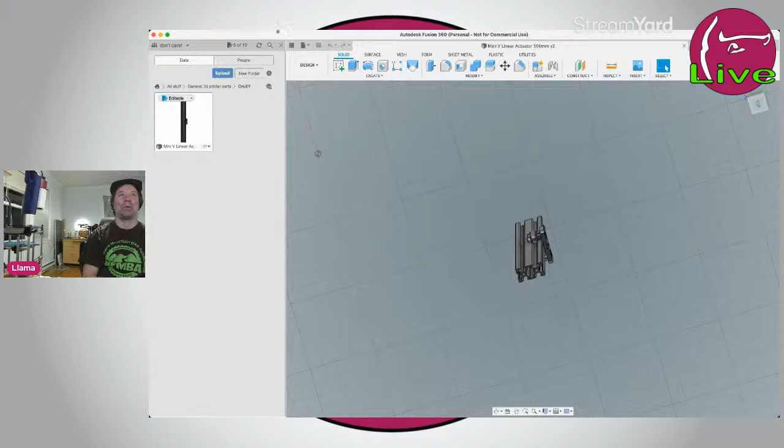What's up? Apple, there we go. It's weird that it does that. That's because it's in a little side window. If I bring it forward, it'll stop doing that. The new Apple app shelf, they have a little shelf on the side now.

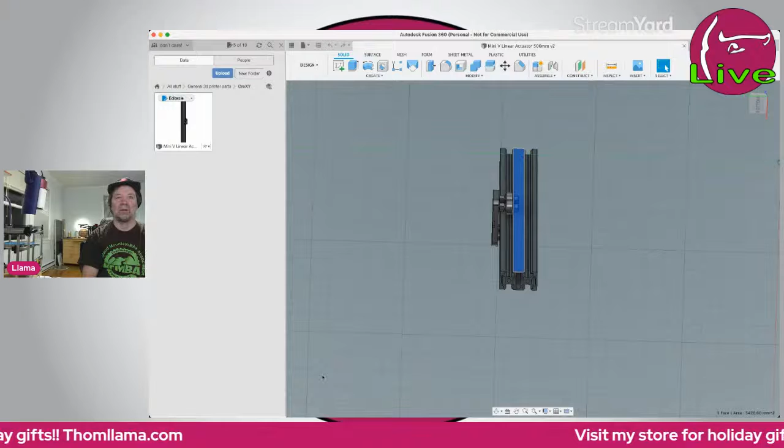So I'm really not sure what I'm going to do here, but I'm going to do something. But I think all I want is this. Where is it? Where is it? Right here. V-slot.

Is it done yet? Haven't even started. What's up, Mr. Monkey Man? How is life?

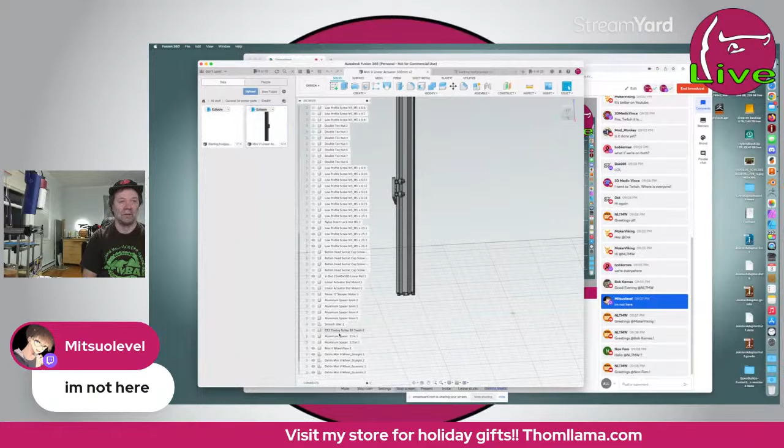Link, import new version, which it actually might not let me do where that's not my design. It is not my design, so it might not let me do it. Do you know what I can do? I can, right here, I believe, just grab the body.

And copy it, and go over here and paste it. Maybe not. I guess not. Maybe because I don't own that. That's not good. When you don't pay for it, it does.

I'm not paying for this. And where it's a proprietary item, it will anyways. All of them will, any of the good ones will.

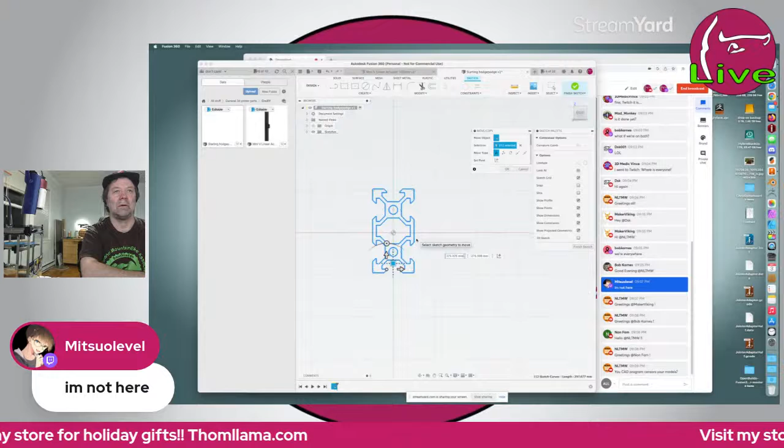Okay, project, and I know that's not actually what I want to do. Okay, but I think copy. Save, export. Copy, so I go over to here. I believe I can start a thing and hit paste. Okay, where is it? There it is. Okay, and there it is.

That's what I wanted. Now I can do an extrusion, solid. That was easy. And just go 400 for now. All right, we have a piece of freaking 2040 extrusion. What do you know?

20, 40. That's lighting.

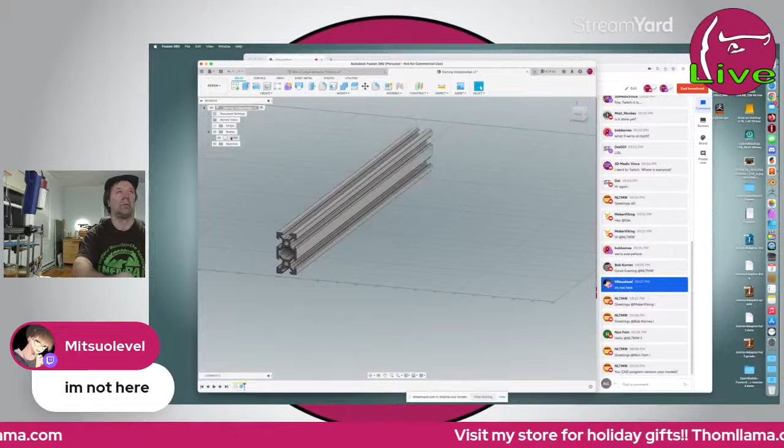Rename. Okay, so now I can take this, edit, copy, edit, paste. And I can go into Y in 400. I'm not worried about it being actually accurate yet, I'm just trying to get the basics going, get a concept here of what I'm going to do.

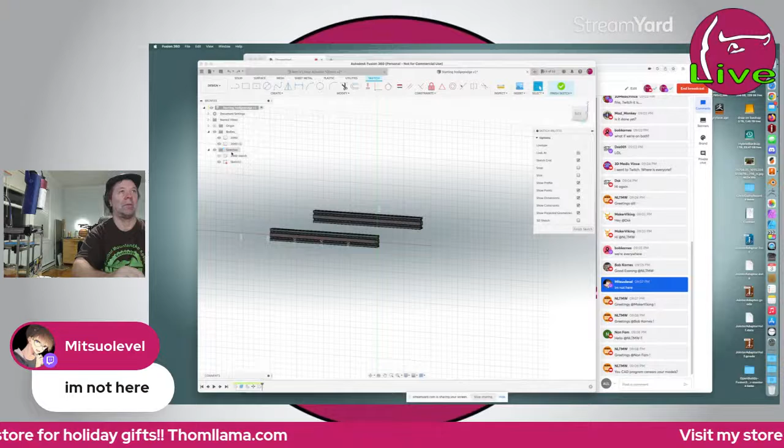And all that crap. Actually, I don't need to do that. Command Z. Because what I can do is, I actually want to start it there and go back to there. Okay, I want to paste. Where did it go? Why doesn't it ever paste it where you need it? Where the hell is it? Oh, it pasted another hole. I didn't want that, gosh darn it. I want this. I screwed up. Finish sketch.

Because I already copied and pasted, project, because that's the only way you can get it. Project the body, this one. Okay. That select the outlines too. Oh, let's find out. Copy. Finish sketch. No, that's not doing what I want. Copy. Sometimes it doesn't do it from the copy, so I'm going to go up here and actually hit copy.

What's up, Polymate? How have you been, my friend?

How has life been? All right, now I want to get to the front, and I want to go in there, and I want to sketch, and I want to paste, Command V, and that kind of did what I want. And actually what I think I'm going to do is do it over here, because I'm going to make this 2020.

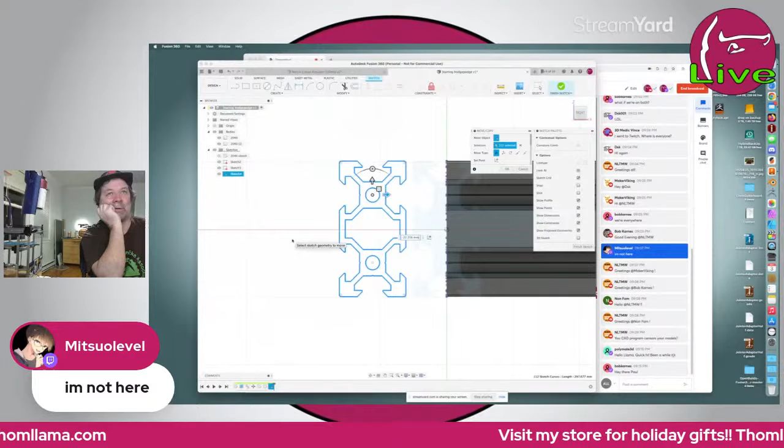Okay, so I'm going to, okay, it does do that. So I can go like so, hit delete, and then I can go like so, and make this a, whoops, that's not what I wanted. I wanted to make it a sketch line. And then I can like this and create a mirror. And then I can extrude that. Negative 400. And boom, I've got a piece 2020.

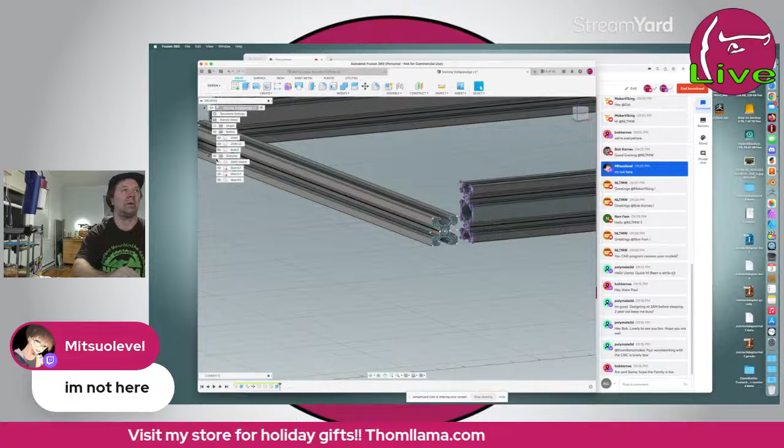Whoa, I just want this body. This is 2020. And I should be making these all individual components, but I'm not yet. This is just a concept anyways.

And pitch this over here, about 400. And those all line up. I don't care about it being perfect at this point. I'm good designing at 2 a.m. before sleep. 2-year-old keeps me busy.

Oh right, it's like really early in the morning over there, huh? Hey wow, your woodworking with the CNC is lovely. Thank you. Yeah, I've been watching your speaker modifications and stuff, looks pretty cool.

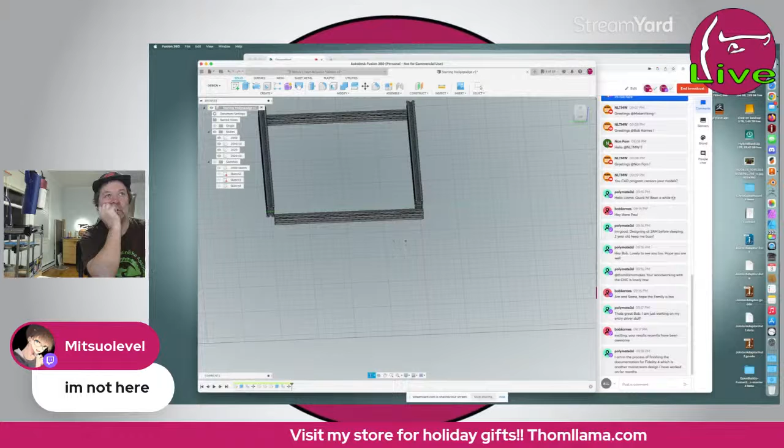So, if I... Okay, why did my controls also die? Yeah, let's move this one somewhat into line.

It don't have to be perfect at the moment because none of this stuff really matters other than for my head, for my brain power. Because lengths of these are all unimportant. Placement is sort of important, but not even really, other than they're flush on the top or bottom. And again, I should make all of these frickin' components.

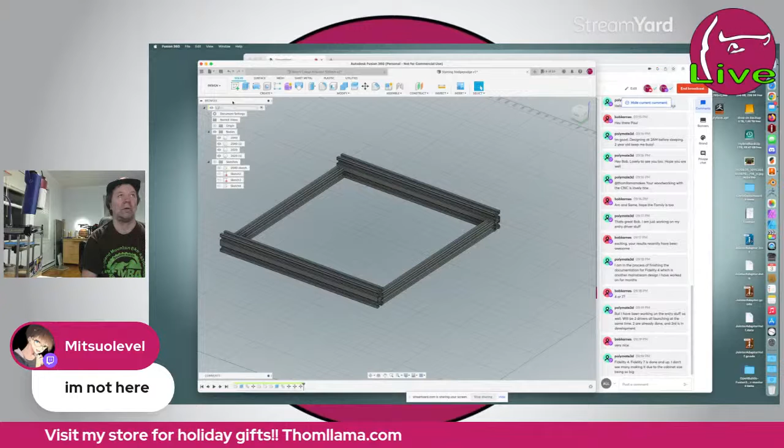Edit, paste. This is going to go up here. Oh oops, that's not what I wanted. What the hell did I do? I did something wrong. Paste. There we go, bring it this way. Bring it this way. Okay.

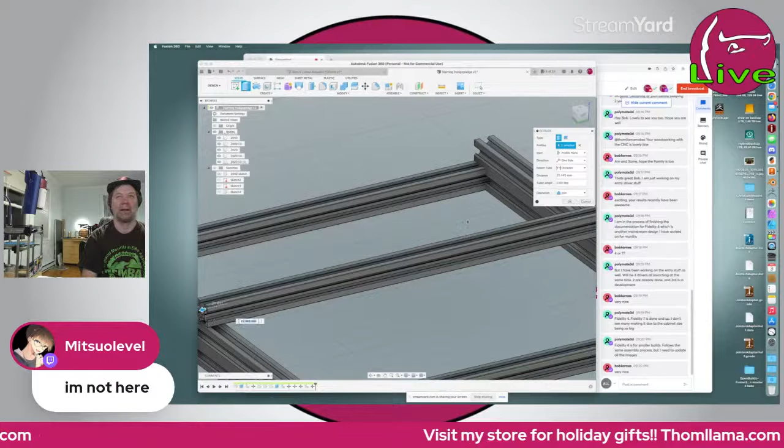Again, this is just so I have a concept of what I want to do. I will be doing this again and making things actually accurate in the long run. But for now, let's see, we'll make that the X gantry.

Copy. Paste. Negative 90, I guess, will work. Oops, I didn't want to do that. But, Y gantry. And let's move the Y gantry. It's going to go over here. And it's going to go over here. And it's going to go down here, like right about there. Okay then.

Bong, I have an email. YouTube, new comment from.

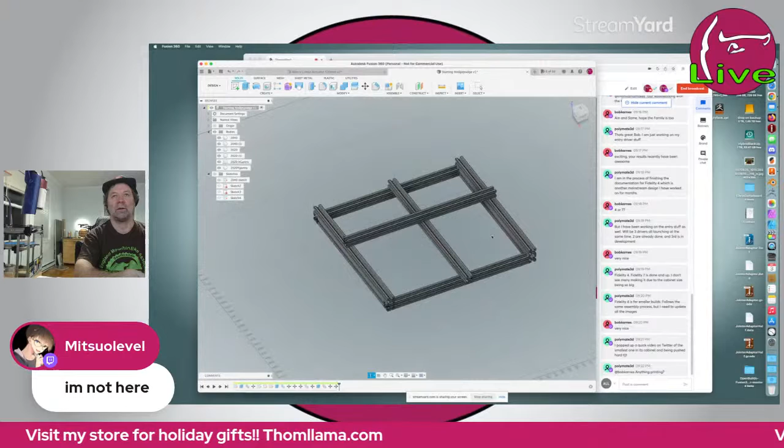Lost my mind, I want to actually do this. Yep, okay. So, here's sort of how it's going to go. I got to move that some more. It's got to go this way, some. Okay then. And then let's just edit this back this way. So it's about there. And everything lines up where it's supposed to be.

Merry Christmas, hedgehogs. Why, are you printing a Christmas hedgehog, Bob? Oh, that's what I got you. Polymate was asking you what you were printing. You're printing Vikings freaking hedgehogs. It's not a Viking helmet hedgehog? Is it not a Viking helmet hedgehog? This printable is going to let me log in today.

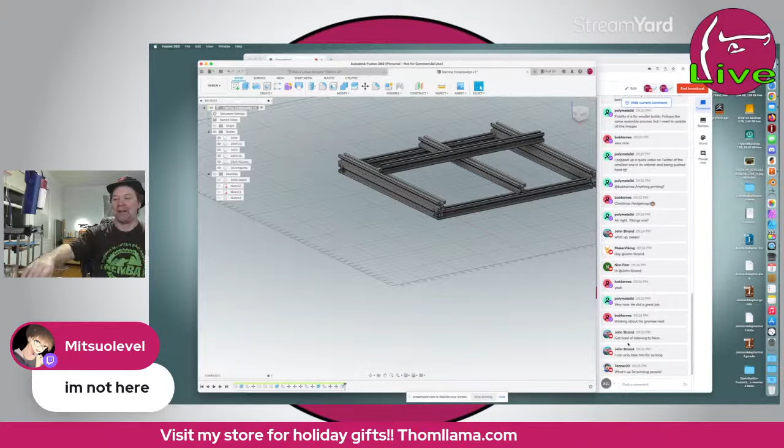Got tired of listening to Nero. Yeah, I like Nero a lot. Don't get me wrong, but he has changed some, but there was only so many freaking Vorons you can see him build that it just gets tired.

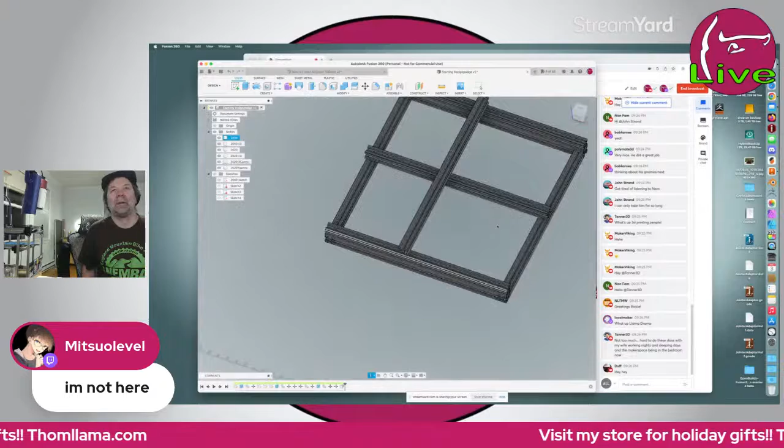So anyway, that's the basis of the Cross Gantry. So I'll be using a 2020 down here with the wheels like that on it. And then on top of this one, it'll be another one. And then what's up, Duff? And then I have to think about how I'm going to mate it all here to work. And part of the thought was, can I isolate this thing? Let me just grab that. No, didn't think so.

That's their mini wheel cart. It's not your standard wheels, it's mini wheels, which is what I actually use on this. No, this is not an Ender. So it'll be a cross gantry. Basically, right here, the extruder sits. And as this goes back and forth, it goes back and forth. And as this goes back and forth, it goes back and forth.

Yeah, it's a fancy new printer design that's been around a really long time because Ultimakers are actually Cross Gantry or CroXY. It's what Ultimakers are. And for some reason, I think Ultimaker has a patent on it, or someone does, and Ultimaker licenses it or something. Because there's only like 3 printers that have them. Ultimaker has them. I believe a couple of Raise3Ds have them. And I think Sigma or someone with an S that's all in Europe a lot. It's like a big semi-professional Signa, something like that. I think they have one too. That's a cross gantry.

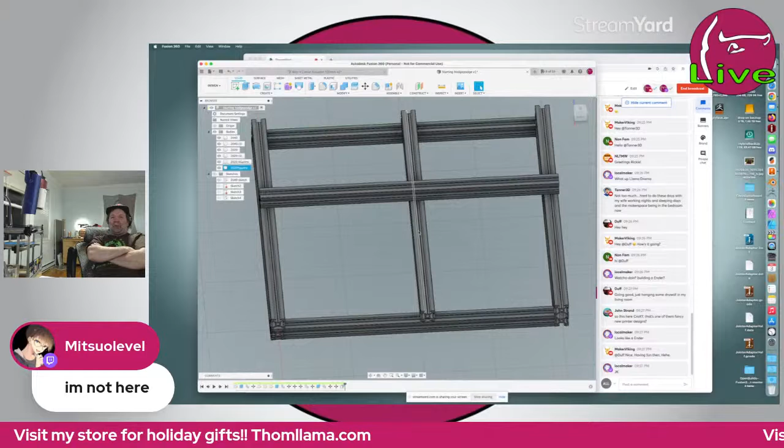Basically, it's the same concept as all the other ones. It's just I'm going to run a belt from here to the motor, from here to the motor for the one gantry, and then the same thing on here. You'll have a motor here somewhere, and there'll be a belt on both ends of this going back and forth. And like, yeah, it's the same thing. I can't do linear rails basically because I can't afford linear rails. And I already have all the 2020, and I have a buttload of these 2020 mini carriages because I just tore some printers apart. Actually, it's less complicated than CoreXY.

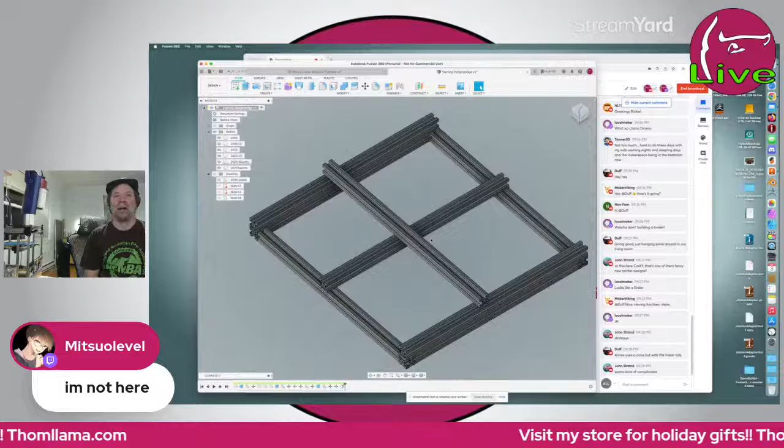I mean, in all reality, you only need one motor and one belt driving one of these. The problem is this thing, I'll never get it tight enough and within tolerance that this thing will move smoothly and squarely by not having a belt on the other side, which is no big deal. You just have a loop out and back and a loop out and back, and then over here you have a loop out and back, and over here you have a loop out and back, and that's it. The only real complicated part is the gantry here, and it's not complicated. It's just figuring out the best way to do it. And I'm thinking, because normally you would put it on the side here.

Let's just draw a plate here. Let's see, I can get rid of that one. I'm not used to working in such a small window. I usually fill my screen with this thing. So if I have a plate right here, I don't want you locking into anything. So if I put the plate right here, and what the hell happened? Oh, I got these off. That's what happened. Extrude it, say 5 millimeters, and try and join because it's touching it.

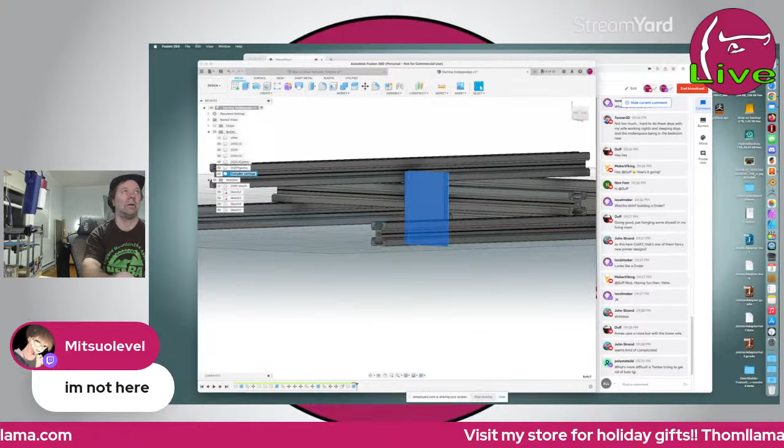New body. Okay, I should be doing components, but if I put this one here, and the wheels right on the top and bottom track, like you normally would, like an Ender or any other wheeled carriages, and if you copy, paste, and then I just rotate it 90 degrees, and then I shift it this way a little bit, boom, -55, say, okay. So you can mount your extruder here, and this would actually have to go up.

And feature, it's got to go up here. So it bridges that. But that's not really good either, but it's all right. It's close enough. Again, I'm just drawing this up for a concept.

What's more difficult is Twitter trying to get rid of bots. Yeah, Twitter's brought in bots, but we're not going to get into all that BS right now.

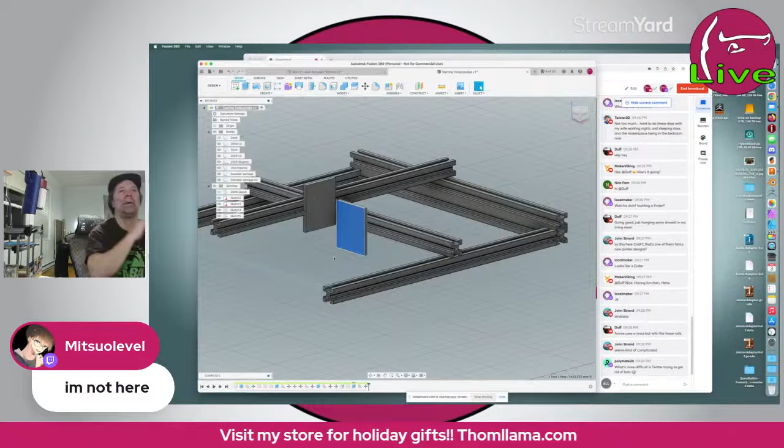So if I mount the extruder here, and the wheels are on top and bottom, as this thing moves back and forth, it's going to drag this with it, and it'll roll down there. And as it moves back and forth on here, it's going to drag it on there. And everything lines up, and it's actually pretty easy. The hard part is these plates right here, how I'm actually going to attach them and make them actually work.

Because the other thought I had was to take this and just go 90 and then bring it up and then bring it over. So it's like that. And then the extruder somehow mounts to this and this. And as it moves around, they both move.

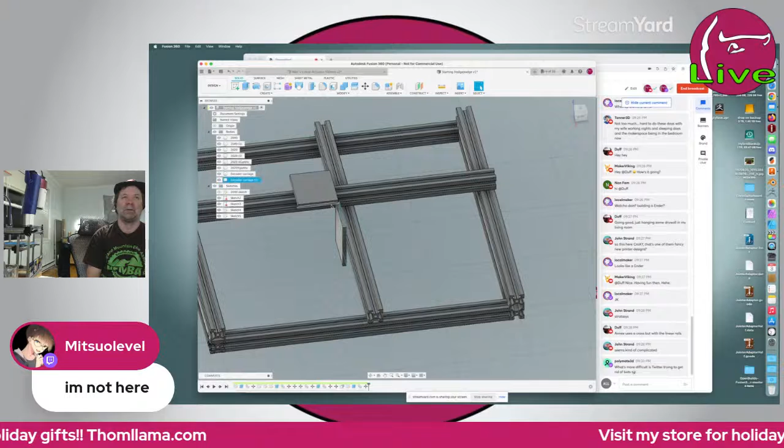And this is actually better for pulling, like when this one pulls it, it'll slide easier because it's pulling on the tension of, the wheel will be down here, right here, and right here. So as it pulls it back and forth, it's pulling level on the wheel. It's not trying to roll the wheel on the bolt. Does that make sense? The tension on the wheel is in line with the bearings. It's not trying to twist the bearing. So this, in one way, is a better layout.

But how to do it, I mean, it would be better if this one was too. I'm not sure how I would go about, maybe bring it up, bring it over, up above that. Yep. If I mount them both like this, how to attach them to the extruder is the weird part. This is the only complicated part. The rest of it's easy.

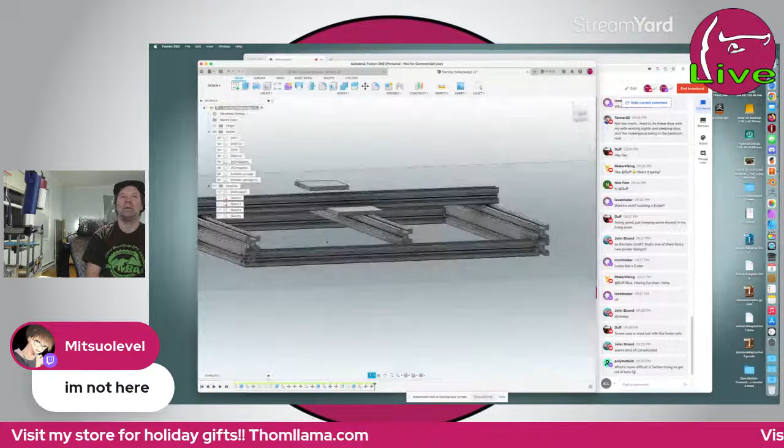It's just a wheel carriage here, a wheel carriage here, a wheel carriage here, a wheel carriage here, and then a generic freaking pulley loop on the front and back. The only hard part is if I can do it with a rod for the motor. Like I can mount the motor on one end and use just a smooth 8mm rod and put a pulley on each end of it to operate the belts. Or you can get one of those fancy motors that sits in the middle and has the drive shaft coming out each end. Six of one, half a dozen the other.

As far as I'm concerned, because I've got 8,000 motors, I will probably just use a smooth rod with a pulley on each end. Because I have pulleys and I have 8mm rods and I have motors. I'm going to try and use this, or the other half of this. That wasn't too good.

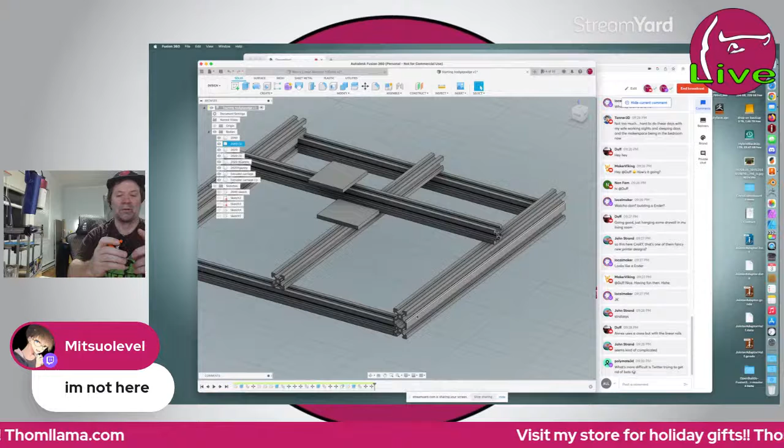Max sent me the newer body to this. This is the older body. And he sent me a newer one, which the wheels are not 3D printed anymore. They're injection molded. And the little orange disc is aluminum. And the whole body, because there's a lot of aluminum parts, is like half, 3/4 of an inch shallower, smaller. It's a little bit lighter too, I think. But that's neither here nor there. It's how am I going to mount it to these plates if I do it this way.

It's basically a wheel goes here. You know, wheels go here, here, here, here. There's 4. If I cut, I got some aluminum sheet outside. I've always wanted to try my CNC on aluminum. Oh, that will be dangerous. I don't have a bit that'll cut aluminum, at least not well. But I can get one, I guess.

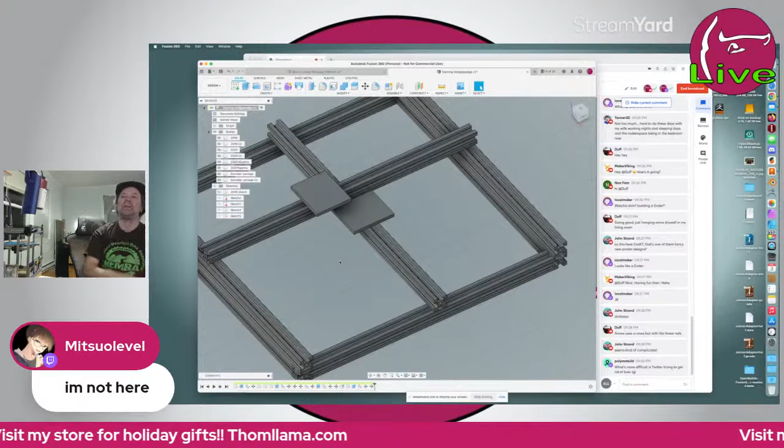And I can CNC it. I'd have to go really, really slow. I mean, the spindle and everything, I have no problems with it cutting aluminum. I'm just wondering if the actual frame is stiff enough to do it at any decent speed. If I cut slow, though, it'll be accurate enough for this. But then I could do a 3-wheel setup, like every Ender in the world, and only have one tension area, one eccentric nut instead of 2. Or I could just custom make a frickin' 3D printed carriage for all of this, which is what I have a feeling I'm going to do.

Because if I move this one out over this one, and that one stays there, and I connect these 2, and then I just put a plate between these 2, mount the extruder to it, I'm pretty much done. You guys probably can't visualize what I'm talking about, huh? That's all I'm doing tonight is laying this out and visualizing. This is my big problem, the extruder carriage. How I'm going to make the extruder carriage work.

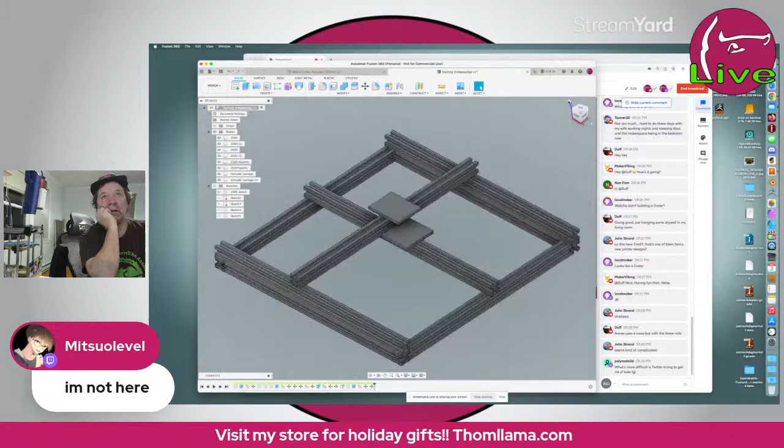Everyone's left. There's only 6 people still watching. I bored them all. That's not unusual. This is not for the faint of heart.

So, if I stack the carriages like this, I'm trying to think of how I can make this motor.

This is the body of the extruder. There's a motor that goes on here. These are the mounting points right here, which I can customize. The extruder is actually, there are the hot ends right here. Mounts right directly to this with the little plate and everything.

If you haven't seen an Omnia drop, go look at them. They're really cool. They work really well. This thing's like 3 years old. Look how perfect it is. And I use this heavily. This is on here.

And then I got a purple one, so I replaced it. This was on there like a year and a half, and then I replaced it. This is the one he sent me for a trial. And then I put it on the pumpkin, which I used the pumpkin more than I used this when it was alive. So this extruder got a lot of use in 3 years.

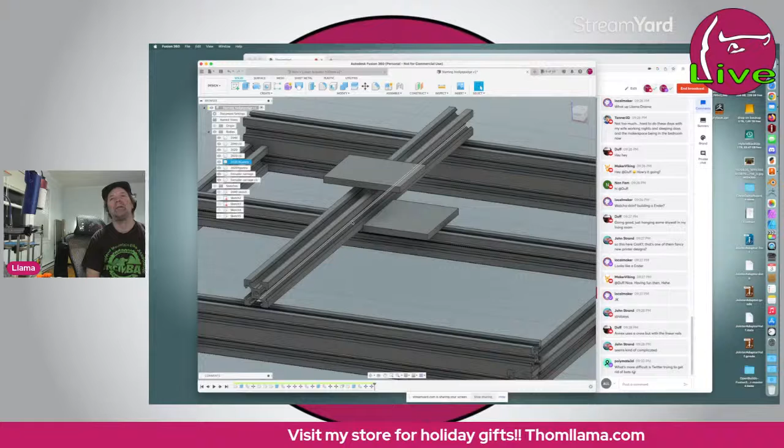So anyway, back to this. I have to figure out how I'm going to make this carriage. What do you guys think? This is the better way to do it. By having the wheels on the side of the extrusion, the forces on the wheel are parallel, in line with the bearing. They're not trying to twist the bearing. Does that make sense? So it's the better method of mounting the wheels for this kind of force.

Because basically, I'm going to have a motor right here. What is it? Their motor's 42 millimeters, 40 millimeters, 40. I'm just going to say they're 40. Again, this is just for a demo.

Why does it do that too? It only does it when I'm streaming.

So if I extrude it that way, whatever it is, let's just do 40 again. Again, this is just for basic idea concept. And then I do an 8 millimeter rod. Okay.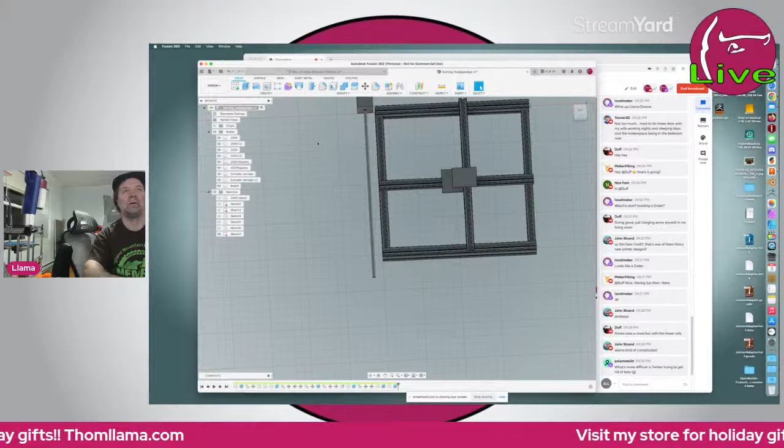Okay, so if I have a pulley here, and actually that would have to go longer. I have to say here. And actually, this whole thing needs to go this way some. So then I can put a pulley here, right there. I can put a pulley here on the 8 millimeter rod. I can put it, would have to be up higher.

Edit. Bring it up to meet that one. Close enough. Again, this is just for concept purposes. So I can have a belt going out and back. I can put a little idler arm here on this end.

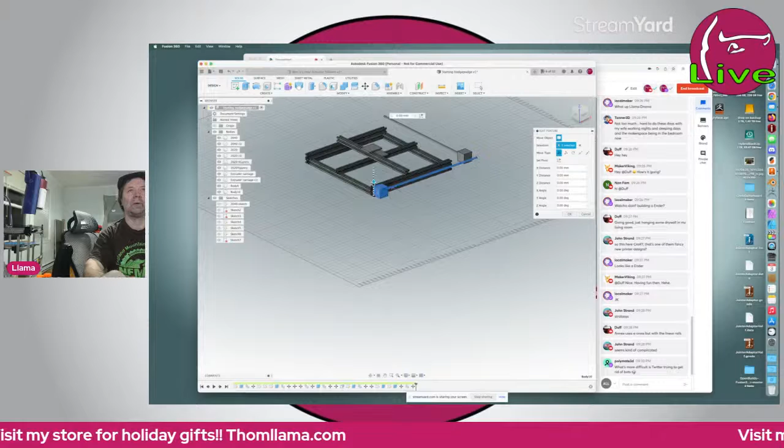Copy, paste. -90. Oops, not done with that. Bring it down here. Bring it out here. Okay.

So this belt loop goes down, catches this, comes back. This belt loop goes around, catches that, back. Boom, done. That should be easy enough. That should be very easy, actually.

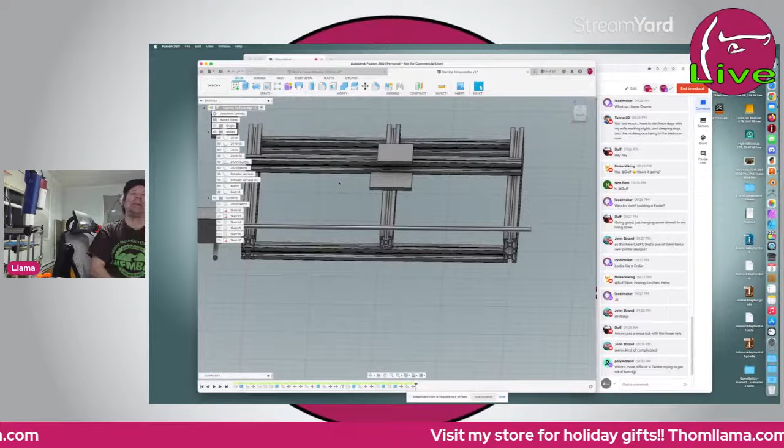I need to get actual dimensions from the carts I'm going to use, unless I'm going to make my own carts. Which might happen. I'm probably going to design this one. I was planning on just using the OpenBuilds mini wheel carts, but I don't think I can. I mean, I always can. It just might be easier to just 3D print the whole cart or multi-part cart.

Now, here's the other thing. One of these two, I only need 2 wheels on. I just thought of that. Because the carriage isn't going to twist. If I put 3 on the top one and only 2 on the bottom one, the 2 on the bottom one are enough. Because the third one doesn't matter so much. Because the anti-twist will happen from the 3 up top.

Or if I do 3 on the bottom and only 2 on the top, either way. All it has to be is one holding it from going forward and one holding it from going back. So if the carriage moves, the extruder carriage moves with it. I might have to think on that.

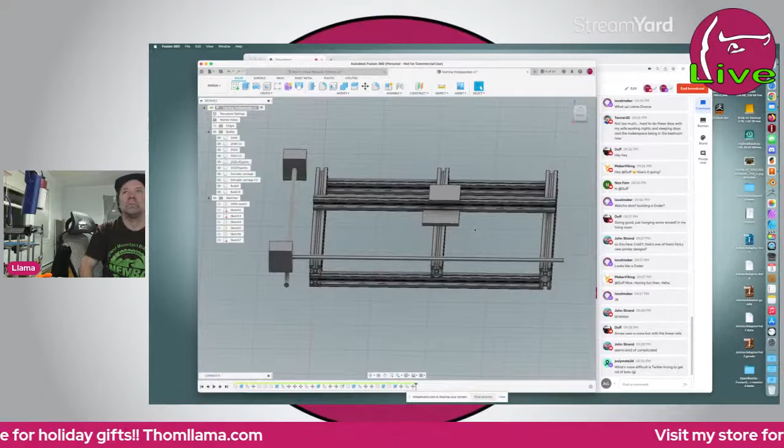What am I going to do, guys? What should I do? Come on, somebody come up with a brilliant idea that I haven't thought of yet.

I don't want the motor dangling too far out. I almost wish the extruder was a little longer, at least 20 millimeters longer, because then I could dangle the motor and everything out over one of the lower extrusions here, right here. I can actually set the motor on top of that, and that way it's somewhat supported and it's not cantilevered out, twisting on everything.

This is the hard part, thinking up that carriage. And I have a couple ideas. Just don't know if I like them.

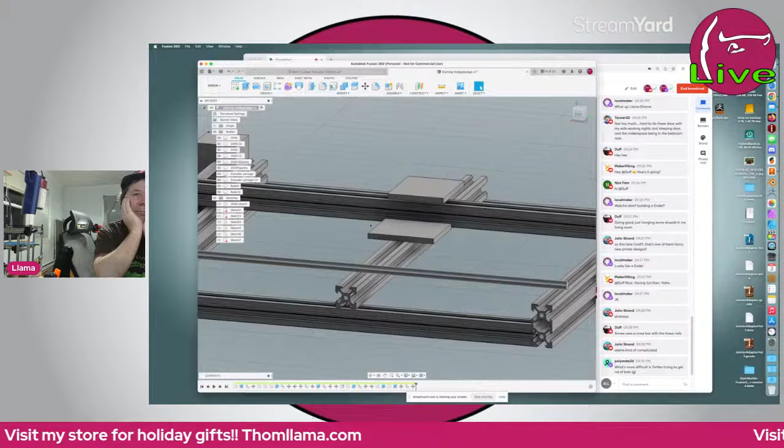Not sure I like the ideas. I'm almost wondering if I can do 2 and 2. 2 wheels on this carriage and 2 wheels on this carriage, because where the carriages are mounted and racked, they're racked to the main frame. They can't rack once they're set. So the whole unit, as long as I counterbalance the wheels, the whole carriage can't rack. Because if it tries to rack on this one, this one will stop it. And if it tries to rack on this one, this one will stop it.

So I can almost do 2 wheels on, instead of like the normal 3-wheel triangle that you have on every Ender carriage. There's always 2 on the top and 1 on the bottom, and the 1 on the bottom is your eccentric nut. If you have just 1 and 1, it sounds like it would twist on the extrusion. But with this extrusion being here and it having one-on-one, and then the whole thing being tied together, as long as this is secured and this is secured and the belts are all tight and everything's holding, this thing can't rack. Right? Am I missing something?

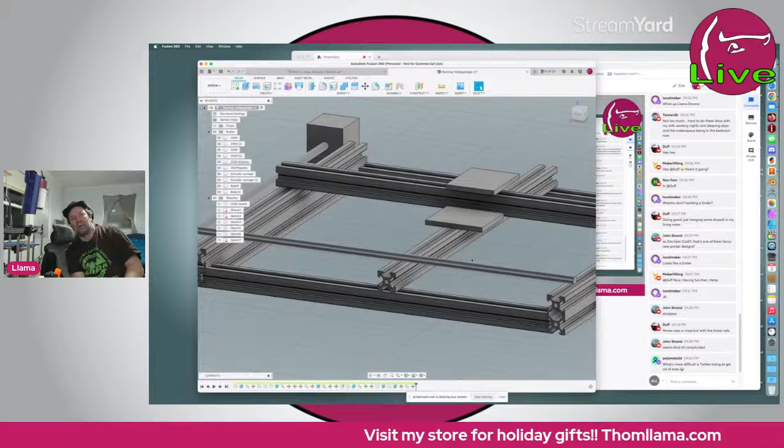The rest of this is all simple. I can make all of those attachments and carts and all that. It's all easy. Done it before. This is my only catch right here. How to mount the actual extruder there. I can stand the side one up. If I stand this one back up, I just hate that because it's pushing on the wheels wrong.

If I do that, I can mount it here. I can put my wheels here. I can put my wheels here. And the only problem is the wheels here are getting torqued side to side as this pulls it back and forth this way. As this gantry gets yanked back and forth, the wheels are getting twisted. They're not in line with the pressure being applied.

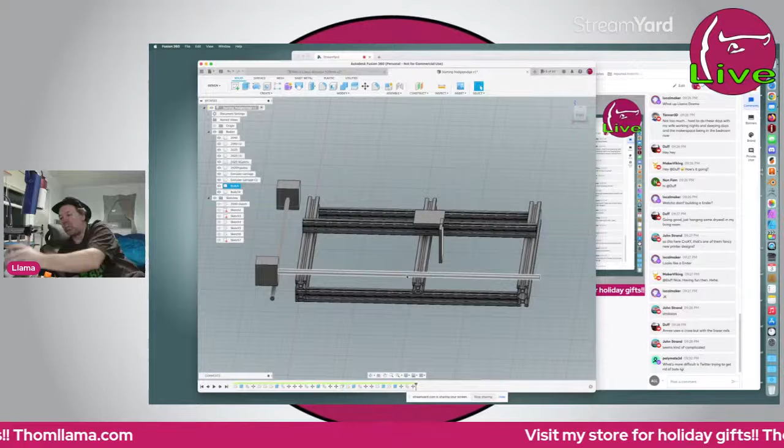They are as this is going back and forth, but as this one that it's actually riding on is going back and forth, that's going to try and twist the wheels on their bearings. Which isn't a good look for the bearings. So I'm better off doing it flat. Thinking I will come up with a solution. That I can guarantee.

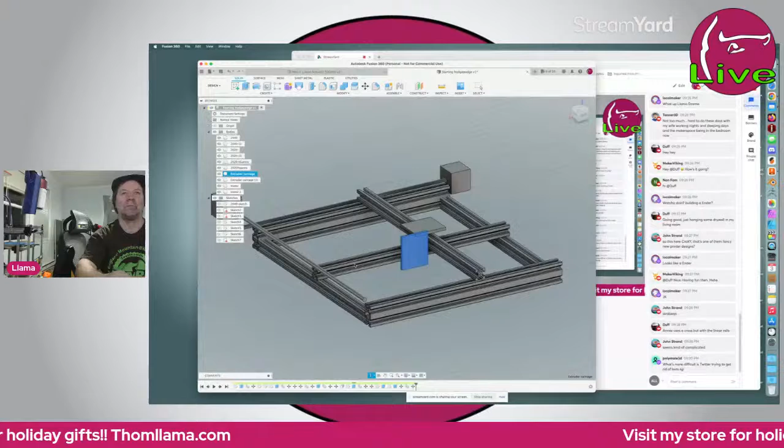So, if I move this, actually, I'll just copy this. Those are motors. Motor 2. All right, extruder carriage. If I copy that, edit, copy, edit, paste, and I bring this over here, and I bring this 90 degrees that way, and I bring it up here. So it's in between these two, which means I gotta raise this, but that's not a big deal.

And then I basically set it right about there, extend it out to here. I really don't need to extend that, I don't think, any more this direction, but we will. So I could put a wheel here, literally right underneath this, and then a wheel here, kind of diagonal across this one.

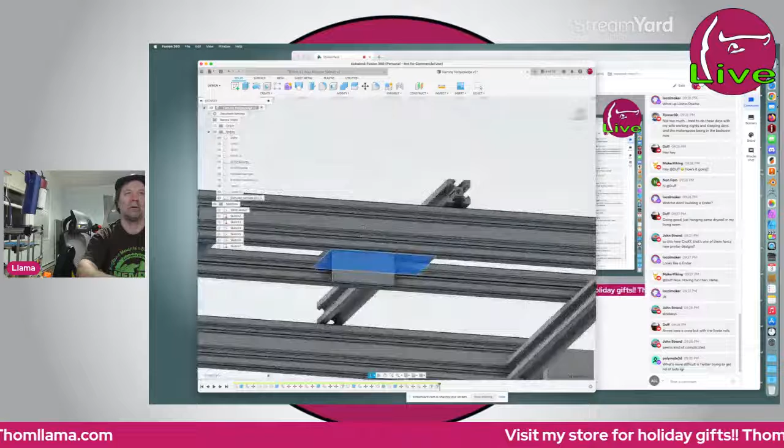So I look at the bottom, I can put a wheel here, a wheel here, and a wheel here. Mount the extruder here. This gets a wheel here, here, and here. Or I can have two here actually, and one on this side, and I can make this smaller. Although I'd rather have the two here because the cantilever action is going to try and pull it down. Will that work?

I wonder if I can just put a wheel here, and a wheel here, like right underneath this extrusion. And then put 3 up here. These 3 will prevent it from twisting. And by only putting 2 on here, I can make this carriage a lot smaller and less obnoxious.

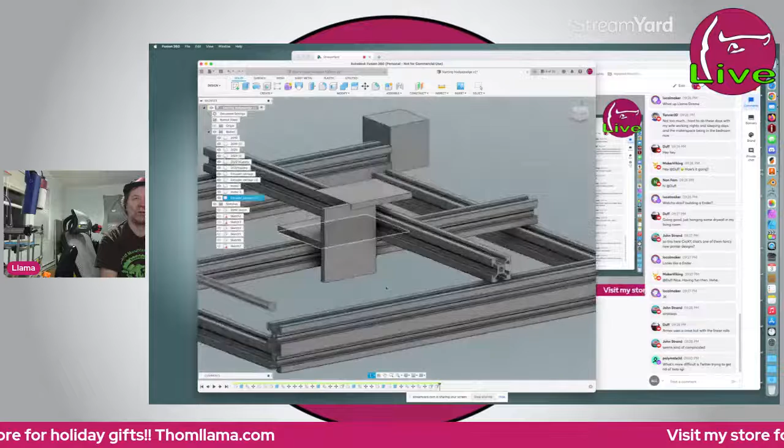And I can counterweight this cantilever action here by having a wheel right behind it and right to the side of it underneath the other extrusion. And that'll help some in preventing twist, I think.

Oh, even better. Remove. Yes, deleted. So if I just do this and make this bigger, let's move this sucker around. I move it right around there. Okay. I can actually do all the wheels on that one plate.

I can put a wheel here and here for this extrusion, and I can put a wheel here and here for this extrusion. And in theory, where it's trapped between the two extrusions with 4 wheels, it shouldn't go anywhere.

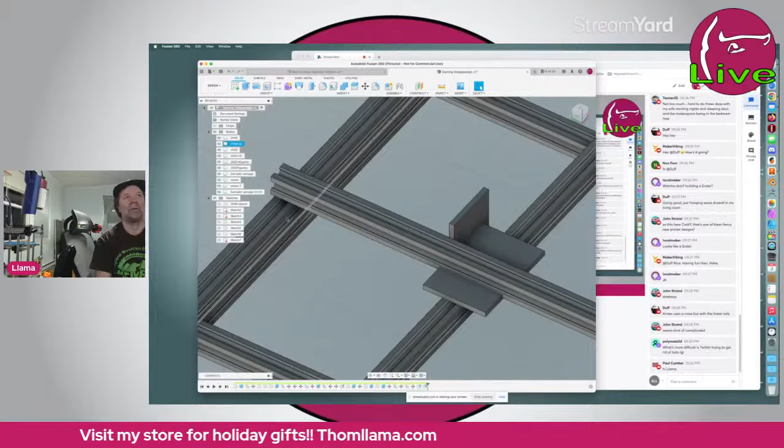Edit, paste. I'm not seeing it. Yeah, it's not gonna let me. Let's try it this way. Copy. Edit. Paste. Nope. Gosh darn it. I just want that stupid little mini wheel.

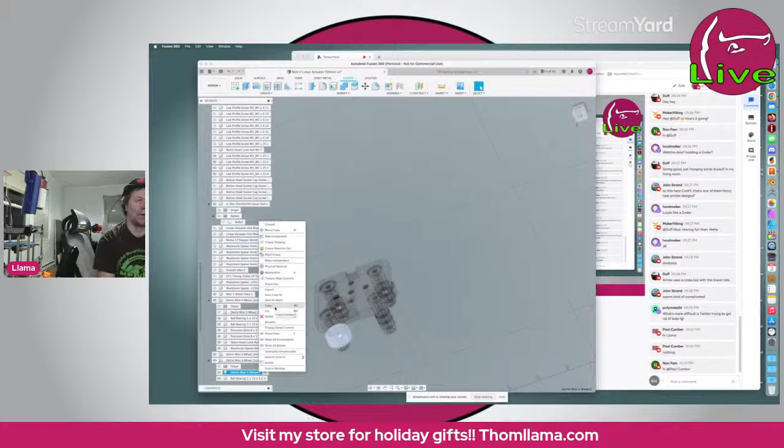Why can't I copy and paste that? Because I'm going across drawings and I think that's a protected drawing. Yeah. Protected design, which makes sense. But I still think that'll work. How big is that thing? What's the diameter of that there puppy? Diameter 15.23. Close. Oh, 15 is good enough.

If I draw a mini wheel right here, 15. Actually, I should do this. Then I can do that. Just go 15. And then go solid and offset by 5 millimeters. Just go 6. And then I'm only going to go 8, right? 7. New body. Okay. So that's my little mini wheel.

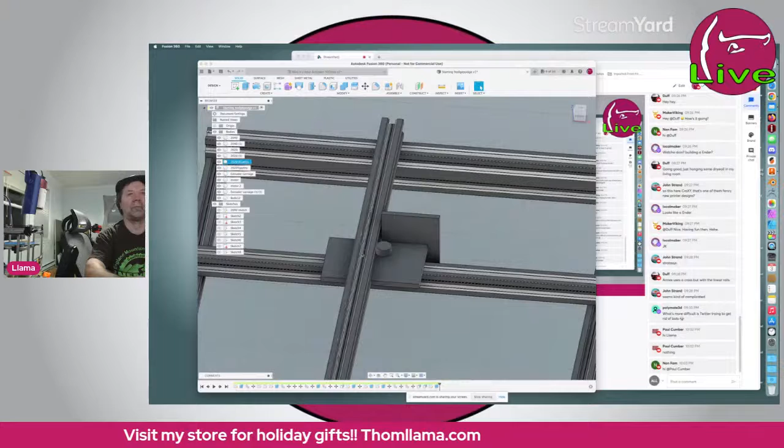I did the extrusion wrong. What did I calculate wrong in my little brain? Because that's not centered in there. Oh, I know why, because that's not centered in there. That's all right. Let's move it, or else it's going to make my brain goofy. It was about there. Okay. So, wheel. I take a wheel, and I copy a wheel, and I paste a wheel. And then I just move it to this side.

Okay. And then I paste another wheel. And I bring it down here. And over here, yeah, will that work? Sure. And then paste another one. Bring it over here.

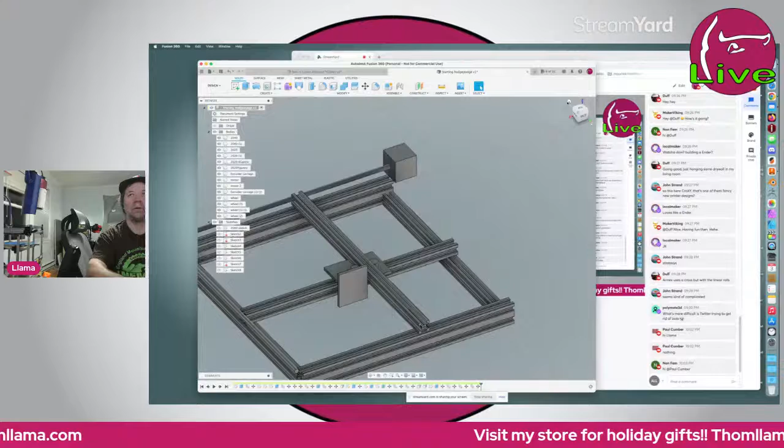So in theory, I can have two wheels here and two wheels here. And as long as they're more offset than I have it there, if I bring these two out to this point a little more, this whole carriage can't rack. In theory. Or can it? No, it can't. It can't rack as long as this 2020 and this 2020 are rigid in its angle.

But I might leave that one in the middle, actually. Cancel. This is the one I want to move. I could do the triangle here to make it a little bit stronger. And do something along those lines. Obviously, I'd line this. Actually, that wouldn't even matter. That's still good enough as long as it's more than halfway past this and these aren't overlapping more than half. It's not going to twist. And that will prevent it from twisting.

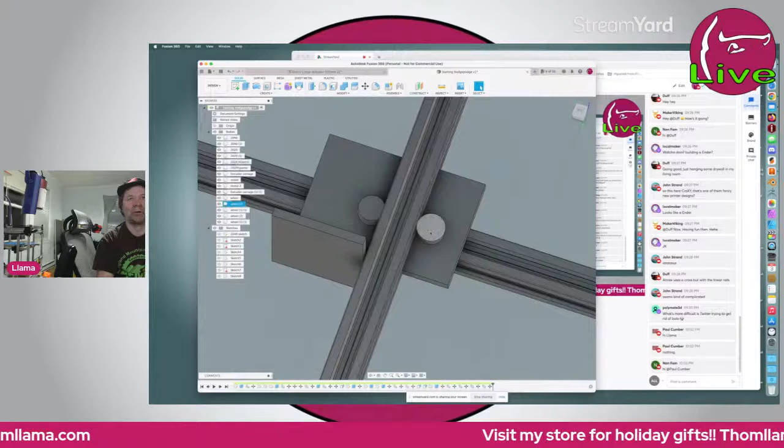So all this has to do is have a front bumper and a rear bumper. So when this 2020 goes back and forth, it pushes the whole carriage back and forth. So I can literally do that with one main plate and then have a side plate to actually just mount the extruder on and pretty much be done.

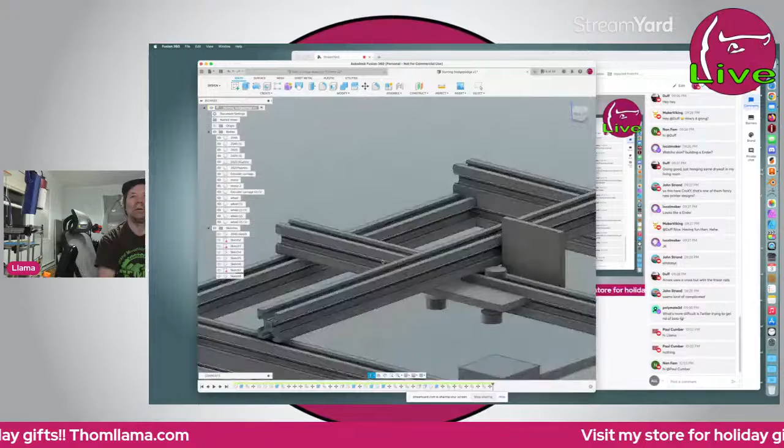Just bring it back this way a little bit. Okay. So this actually gets knocked out, hitting that wheel, but that's not a problem. I can move this wheel this way. Literally put it underneath that other extrusion. That might actually work. And then I really am only making one flat plate and then a mount on the side of it.

Do I like that? I don't hate it. I don't love it. I'm counting the extruder's over here, kind of counterbalancing on the whole kit and caboodle. Which I can move this wheel way out here, stretch this even a little bit longer. Move this wheel way out here so it's got some counter structure forces against the weight of the actual extruder pulling this way, because the extruder is going to try and pull this over to some extent anyways. I'm wondering how wobbly, vibraty that would be.

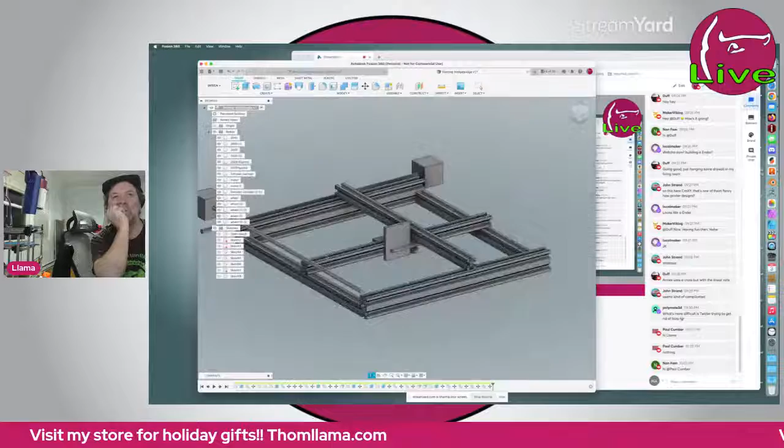Those three got on that. This is going to try and twist with weight this way. It's going to try and pull it this way. And try and pull it this way, which these will stop. And in some effect, these will. Any forces it tries to pull this way, these will also basically stop. And so will these assist.

This might actually work. So I could do it with 5 wheels easily. One plate, one base plate, 5 wheels.

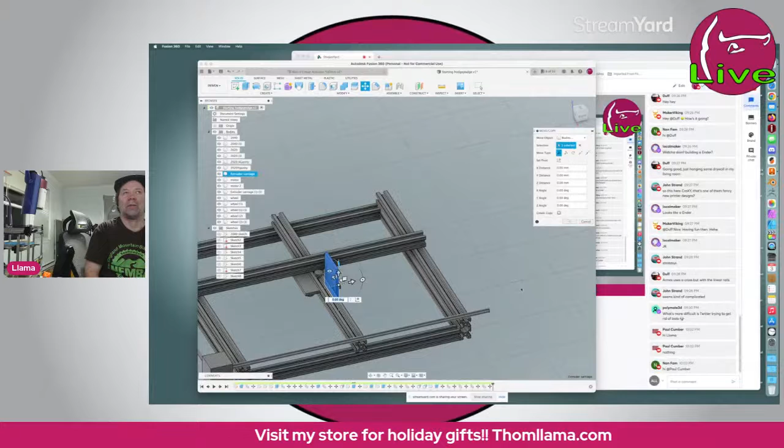And okay, I guess I got to start actually functionally laying this out now that I have a concept I like. Oops, clicked where I shouldn't have clicked. Okay, cancel that.

So that's riding on that. And which one is it? This one right here, ain't it? Yep, this. Bring it way the hell up, just for giggles. Then I can bring this up.

Why does it keep going to faces? I always want bodies. I wish I could make things default. And I can bring this up so it's in between the two.

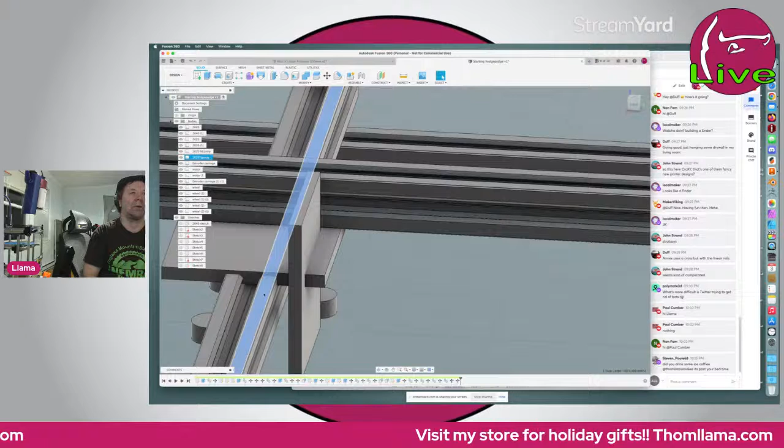That's not what I want. I want this. Move it down so it clears that plate. Okay, that wheel.

And I gotta go back and clean this all up. But this wheel will go right here. Whoops, right here.

Actually, does it have to go there? Can I go way back here with it? I think I can, and that'll counter some of the forces of it. Cantilevering it. Levering the canters. Leave that there.

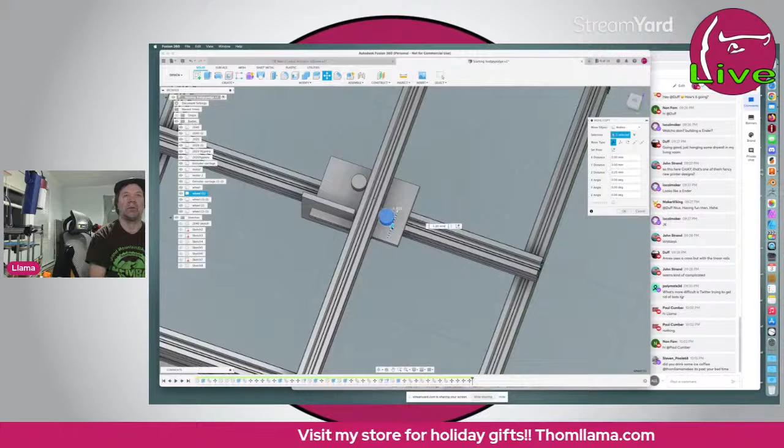Take this wheel and move it again, even though I should be using one of my other movement items. Is that going to end up twisting it at all? Don't think it will. I don't think it can because of the 3 on the bottom.

Can I move all 3 of them at once? Wheel, wheel, wheel, move. I guess I can. Line those up with there. Close enough.

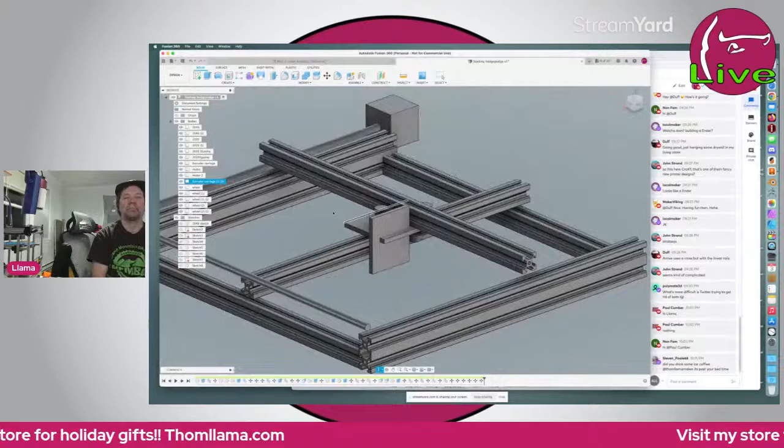I could put a little mounting block right here and have it screw it to it. There'll be a knockout right here.

Gotta change that, feature objects to cut. Only cut the one, and then that's where my extruder goes, and that's my extruder carriage. It's actually pretty simple, in all reality.

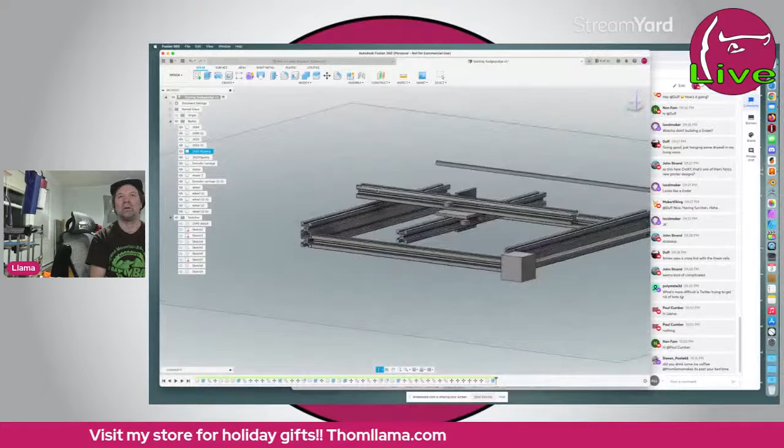And all those 2 wheels have to do is when this goes back and forth, it just pushes the carriage. So it's going this way, this is going to push on it. It's going that way, that one's going to push on it. It's not going to try and twist because these are going to prevent it from twisting.

But I can almost put a 3rd wheel here to even make it better. I can move that wheel. That's this one.

Which wheel is it? I haven't been tagging. I usually sit here and tag all this stuff as I make it, and I just didn't this time. There it is, this one. Edit.

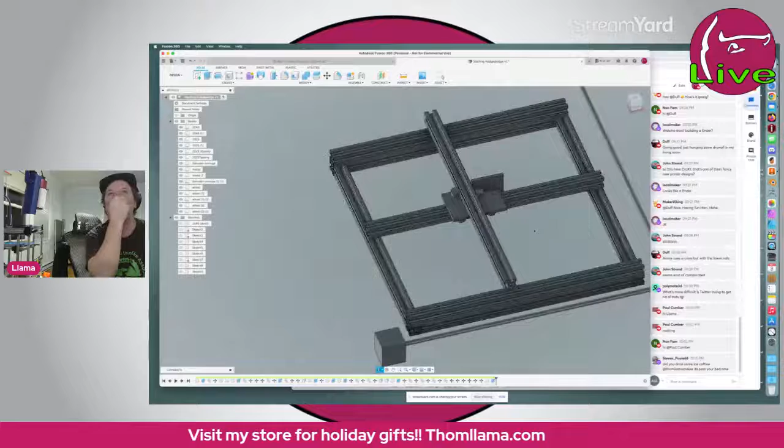If I bring it right here, over that extrusion, and then move that one too. I don't know if that should be in line with right above this extrusion, if that would help or make it worse.

Because this one's pulling back and forth, it's just rolling down. This extrusion here is pulling back and forth on these. This just rolls. This one's moving back and forth. It pushes on here or here, and these three roll.

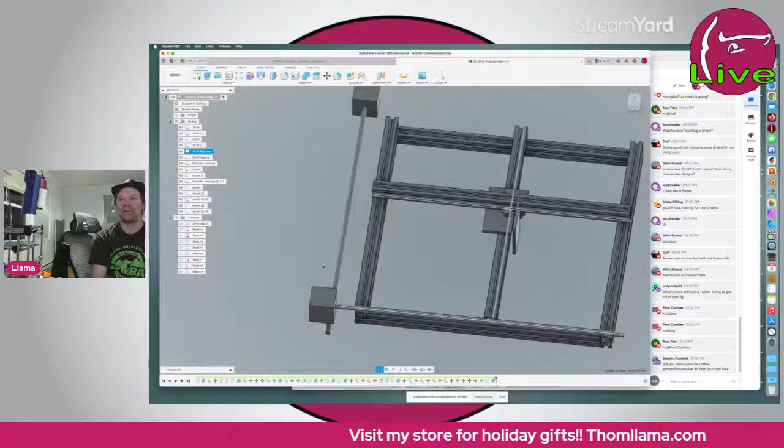No, I'm actually drinking tea. What's up, Steve? Didn't even see you come in. Sorry. What time is it? 10:30. I'm about ready to quit because my back's bothering me sitting in this chair. That's why I'm sitting with it all crooked.

Save this. Menagerie.

But I think this will actually work. I do believe it will work. I'm just debating on the 3 wheels or the 4 wheels here. Stop rotating.

I don't want to take up much more because that's the only downside of this is you lose a lot of space here. And I mean, obviously this doesn't need to be anywhere near this big. In fact, let's crunch it down just for giggles for now.

But you still lose the 20 millimeters of this extrusion plus whatever this is. Figure it's a 15 millimeter wheel, so figure at least 20 millimeters of waste because you need structure on this side of it. Then this needs to be about the size of the extruder, so your frame needs to be a little bigger.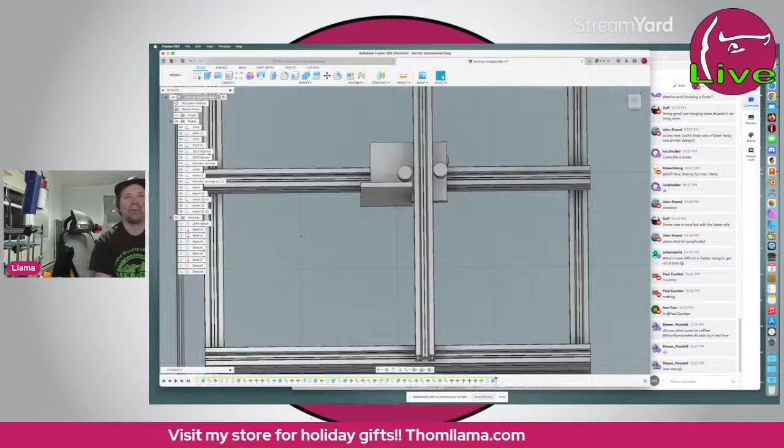It's past my bedtime, see? Yeah, no, I can't afford linear rails. I have most of this stuff where I can make it.

I can either 3D print this whole carriage when I go to do a final design. These 2 pieces will be 1 carriage, or they might be 2 separate carriages. Or I can just cut them out of aluminum. Something this simple I can cut with a jigsaw, I wouldn't even have to use a CNC. I just cut it with a jigsaw. I'd have to take time to lay out where the holes get drilled for the wheel alignment, but even that's not stupid accurate as long as I get the sizes good.

So the bolts, the bolt is tight into the aluminum and the eccentric nut. These would have to be eccentric nut ones, this one and this one.

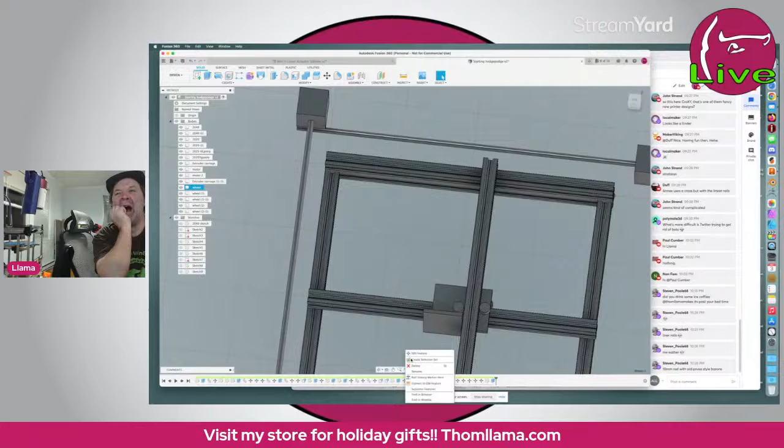Nope, rods are too flexible. And again, I don't have... well, actually, I probably do have them. 10 millimeter rods instead of 8s would be fine, but again, I'd have to buy them, and then I'd have to buy freaking LMUs and all that. Nope, I have all this stuff. I have the extrusion, I have the wheels. I'm doing this with what I got, or 99.99% of what I got. I'm hoping not to buy pretty much anything.

I mean, if I had a choice, these would be all linear rails. There'd be a linear rail here, here, here, here. This would be a linear rail, and this would be a linear rail. So yeah, I need 6 linear rails.

Yep, past my bedtime.

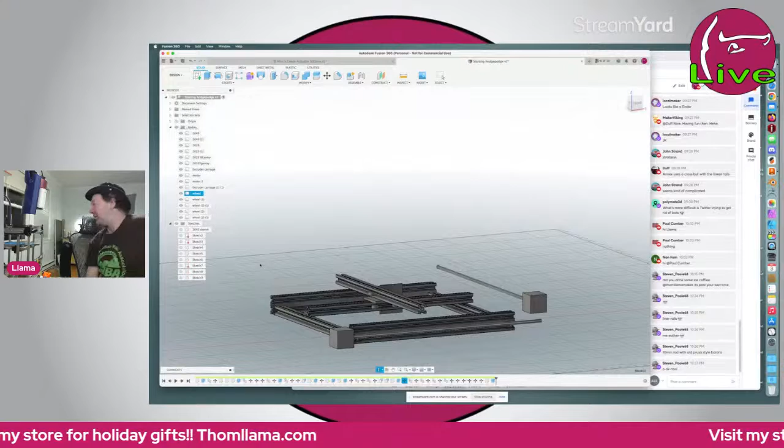And in all reality, this should be cheaper for someone else too. If this actually works, I will release it. Someday I should actually release the Llama Core. Never released the files to that. Not that anyone wants them. I mean, it's actually not a bad printer, but there's better out there.

So that's not a terrible concept. It should work. It should be stable.

I'm still debating on whether I want to put 3 wheels here. I almost do, because I can stack this wheel, this one, move, edit feature. I can literally stack this wheel in line with this wheel. These could just be one bolt holding both wheels. And then I can put another one right here. Right there. And that would make it super duper strong and stable and stiff.

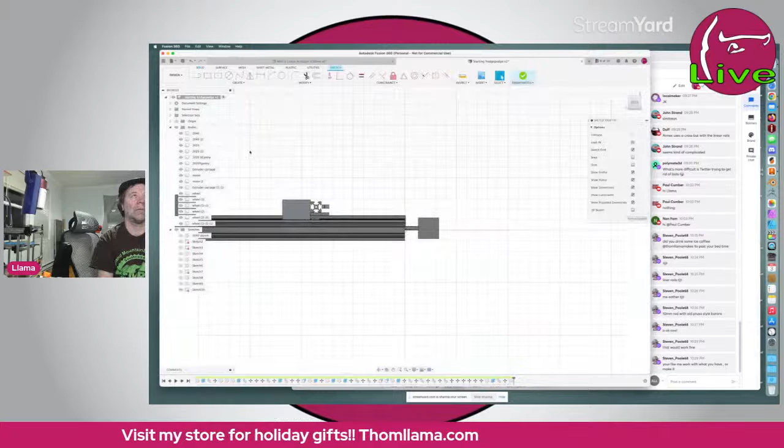Well, the only problem with doing the 2 here is I've got a lot of cantilever weight right here, when you add the extruder here, that one. You know, if this is my extruder, say, that's a lot of cantilever weight out here. The more support I put back here in this corner, over here, that'll counter the... it'll counterweight it. But I do believe that would be plenty strong enough.

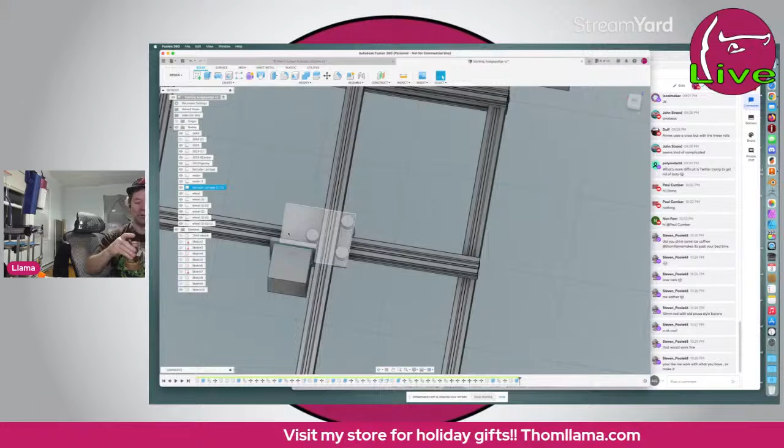Well, that's why I'm doing this. This is just, for one, it's to do it on the cheap, but this will be cheaper for someone else too. You buy linear rails, you're talking hundreds of dollars before you buy anything else. 6 linear rails at 400 or 500 millimeters length for a printer like this, which still isn't going to give you that big of a printer, because again, this is the downside of the Cross Gantry, is the size of this carriage. Now, if I was using 10 millimeter rods like Ultimaker does, it's a lot lighter - or not lighter, it's actually heavier, but it's a lot narrower. It takes up less real estate, because they have them arranged where 2 are stacked and then 2 are flat, and the extruder's right in the middle of the 2 that are flat. So they're not losing the real estate.

Where I can't do that with this - or can I? I can almost slide the extruder underneath this one somewhat. Move the wheel over here. So basically these two stay lined up, all four of them. These two here, these two here. Partially drop the extruder and slide it somewhat under here, but leave enough room so I can still get at this thing.

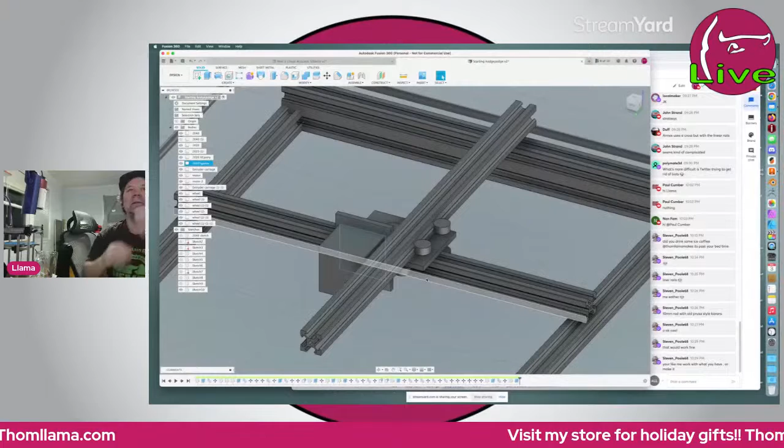And then the motor - no, because then the wheel's in the way of the motor. The wheel would have to be way over here to do that. Like way, way over, because the motor's going to be in the way. Yeah, that's just this extruder body. I'm using this, or the smaller version of this. I have another one of these. The motor's going to come off at this face, this way. Save.

I don't see why that wouldn't work. Yeah, obviously this would be chunked out here. It doesn't need to be that big. Lighten it up as much as you can by cutting the profile in it.

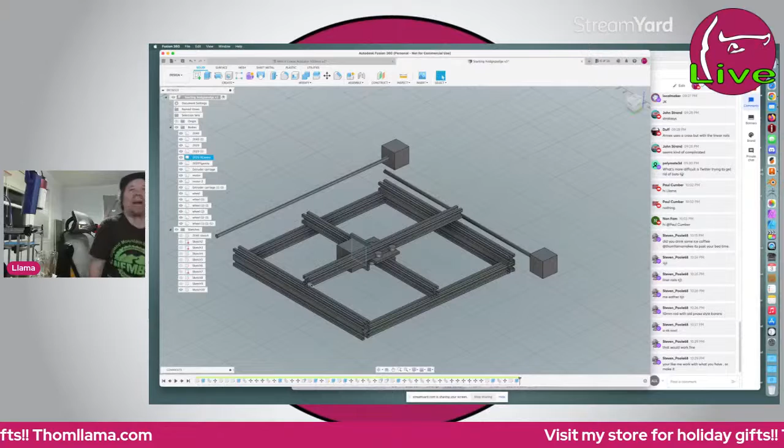That's kind of the whole point of this, is do with what I got. Make a... it's going to be the new hodgepodge. I never finished the hodgepodge. So this is going to be the new hodgepodge printer. I'm going to hodgepodge it with all the parts I got laying around. I'm hoping to buy very little. I have 2040 V-groove, I have plenty of 2020 V-groove now. The rest of the frame can be anything. It doesn't have to be V-groove, although I should have 2 more V-grooves going down for the bed. But even that, I could go to LMUs for that. I have rods and LMUs around here somewhere. Buttload of them. Somewhere. I don't use them anymore because I don't really like LMUs, but not an 8mm anyways.

But that should work. Am I making you guys dizzy with me spinning this thing around trying to eyeball all my forces of twist? Right now I'm trying to figure out what's going to twist as the machine is working and this head's rolling around.

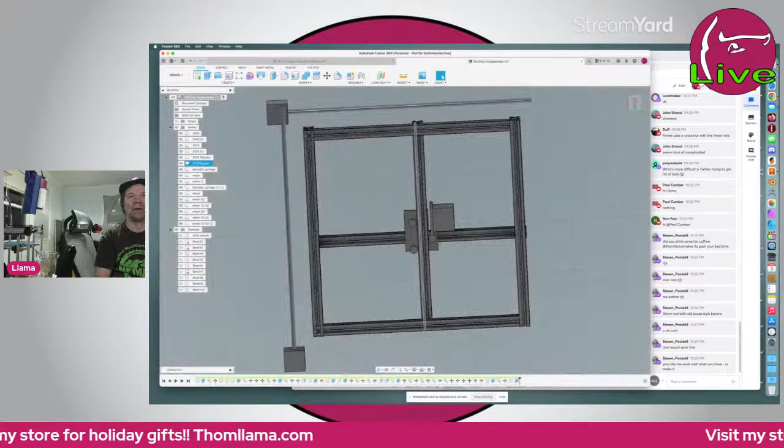But as this goes back and forth, it's on these 3 wheels. As this one goes back and forth, it's on these 3 wheels. And these 2 wheels I can line up perfectly and bolt together. And there's these 2 wheels. And then these 2 wheels.

Saved. I think I'm done for the night, because now my brain's starting to hurt on how I'm going to make that carriage. Not hurt, but I got to figure out a good way to do it. My back's bothering me.

Yeah, so there you have it. There's the beginning, the brainstorming beginning of the CroXY. What am I going to call it? I'm going to call it the Llama Crow. Crow Llama. I kind of like Crow Llama better.

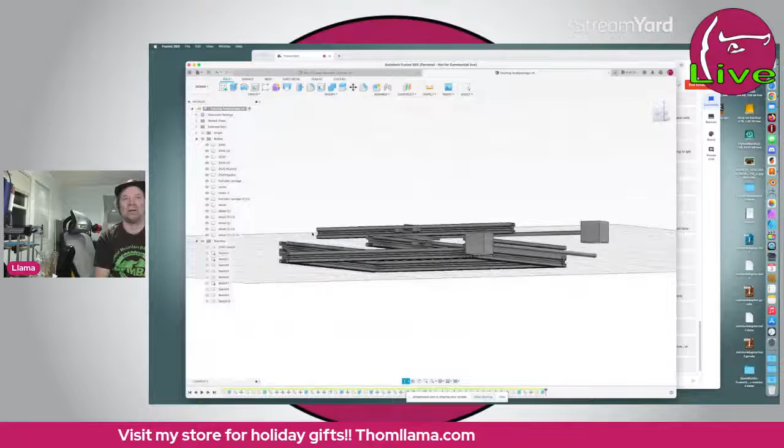So, yeah, that actually looks like it should work. That's my basic concept. I don't see a problem anywhere. About the hardest problem is mounting all of these and countersinking all the holes. But other than that, even that isn't that bad. And then how I'm going to final attach the actual extruder to it.

I think what I'm going to do tomorrow is take this plate right here, do a quick layout, and just 3D print it. Just that part, so I can stick some wheels in it, lay it out, take 2 pieces of extrusion and kind of twist at it and see how it holds.

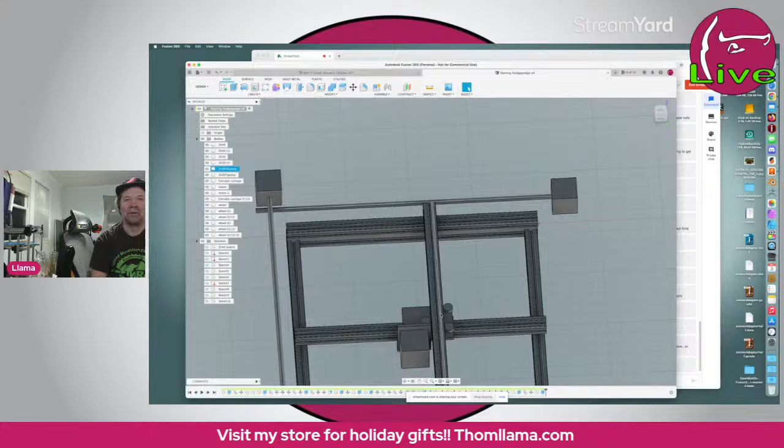And yes, I'm going to do it in 3D printing, so I know it's going to be a little weaker, which in all reality, with this kind of a structure and the 6 wheels laid out the way they are, even 3D printed, that shouldn't be too bad. The only problem I can see is this is a long cantilever out here without any support.

I mean, it's really not going to be that long because I'm going to put like a diagonal here, because it really could cut off most of this, and then have the motor mount there. And there's a lot of cantilever here, a lot of weight out here, out in this general area right here.

And it's really not that hard of a carriage. You can 3D print that whole thing. It may not be perfect, it may be a little flexy. But I can print this flat, design this onto this face right away, and just lay out the 3 ports I have for a mount.

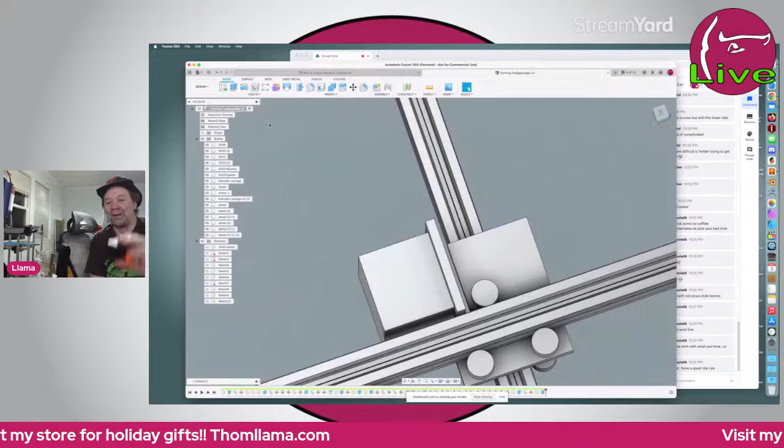Because again, I got to use the mounts I already have in this. I'm not going to have Max making me another body. Hey Max, you want to send me another $200 body? Custom made body from my extruder? Because this is custom made. He made this for me to mount to that printer. I had a plate that I had already built for that printer, and he made this fit it.

And that one, they're both the same. They're the only 2 like it. He made them for me because he's awesome. Because he's awesome.

Yeah, I know why I can't copy it. That's an import, that's why I can't copy from one to the other. If I drew it from scratch, I could, which I can do, and I will do eventually. But I think that's it. I think that's the concept. I think that's what we're going to build. I think that'll work.

On that note, I'm going to kill the stream after an hour and 42 minutes. That's all I did. It actually took less time to figure out than I thought. So, yeah, my back's bothering me.

So, actually, is there anybody on Twitch? Should I raid somebody? You on Twitch? I gotta mute myself. It's like Steve. Explore new shield mode, whatever.